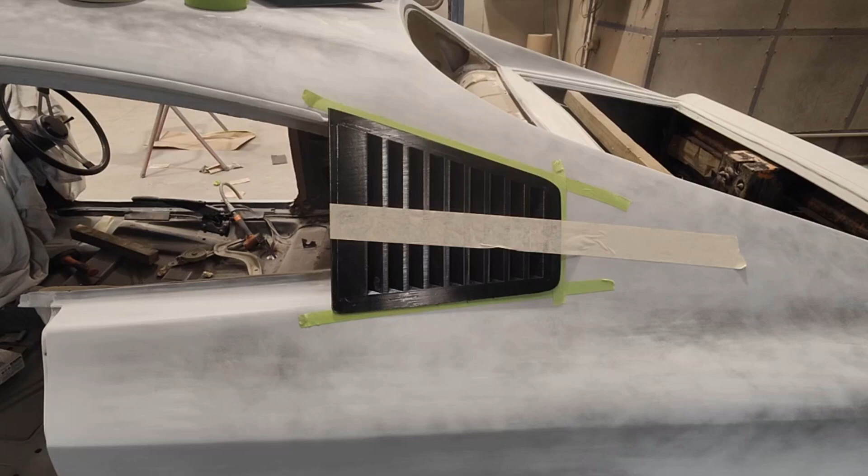Final piece to the puzzle. Make these things fit.

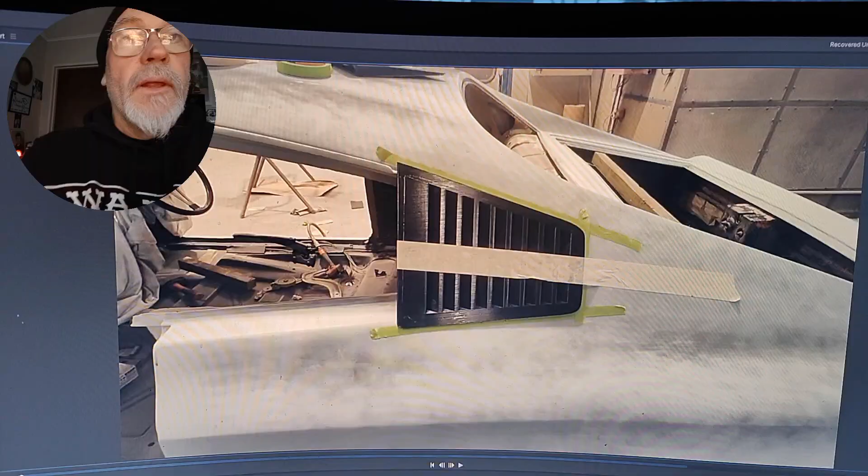Just to wrap a bit more context into this video, the body shop I work at in Invercargill here, we've had these 3D printed. I'd like to do a couple of little tweaks on them if anybody ever wants any.

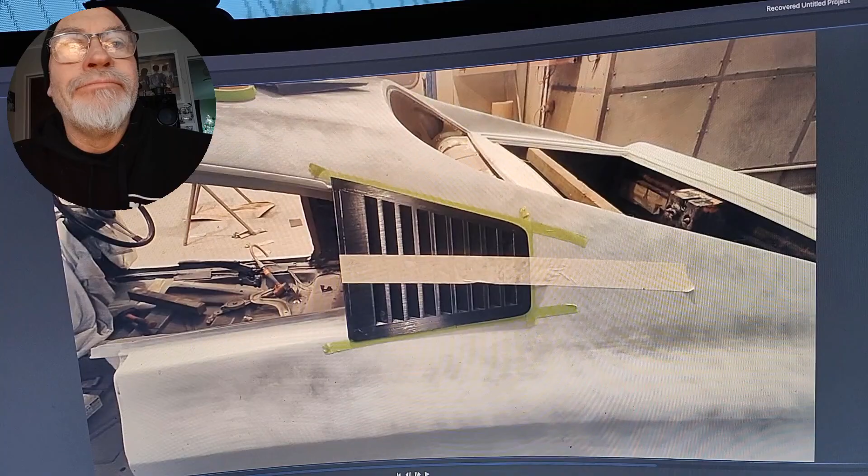I don't even know what these bloody things are called. They're like a louver side trim to the tail piece on a Valiant Charger. You can't even- we've hunted and hunted all over the internet to see if somebody makes them. We had the originals, but they'd been butchered and just filled, whereas they're meant to have a nice little body edge around them.

And I don't know if they were originally glued in or screwed in from the back or what originally. I'm not sure. I had a Charger. I think I explained that in the video a little bit.

I'm just going to add this piece in because I quickly took this video, or a couple of clips, when I was fitting one. But yeah, I had a Charger, but it had a steel piece in here, and then it had a vinyl trim that goes around there.

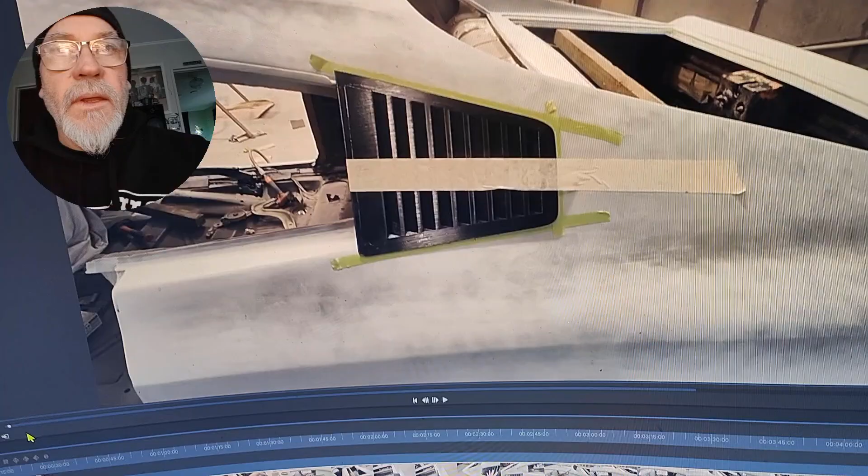So I never knew - it screwed in with 4 screws, 2 here and 2 here, that screwed into the bodywork, I think, from memory. I can probably find a picture on the internet if I really had to. But yeah, nobody seems to remake these. For what reason, I don't know.

Unfortunately this particular pair were still reasonably complete, but all the edges had been ground off, and there was no front edge on them. I don't even know that there's meant to be a front edge, but from all the photos I could see, when the rubber sits in there, there was an edge.

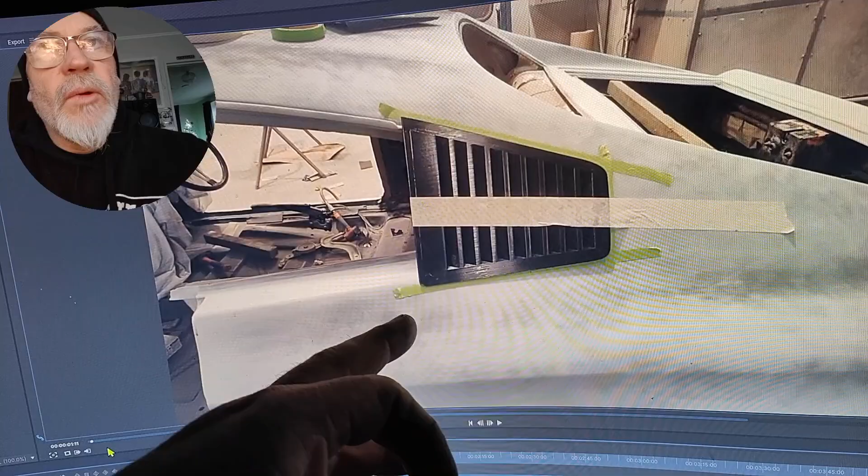So they 3D printed a rough one, and I fiberglass filled in what we needed to, and made it work. And then they made us a better print.

The only thing I would like to do is move this louvering forward a little bit on the print, and just make this edge piece, which we could trim a bit - what should I trim back on this - just a wee bit thicker. It's just a little light.

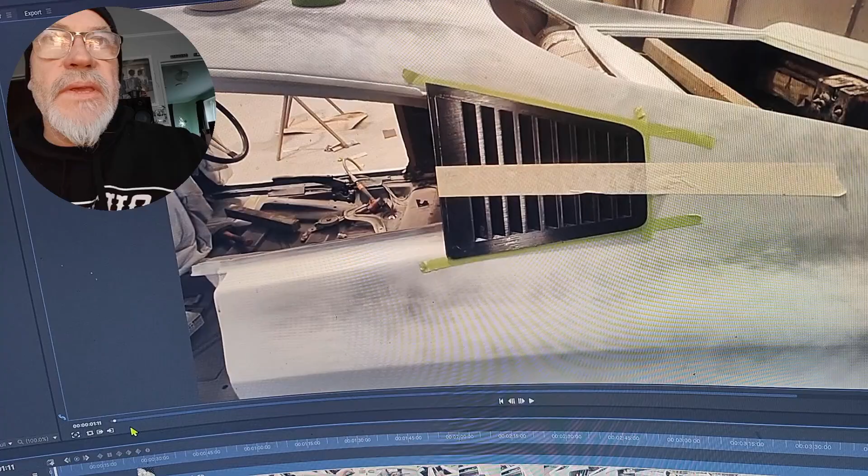I actually put some new tech type filler in around behind it with my finger, and just reinforced it a bit, and it made it quite strong. But if the print was just made a little bit thicker - it's a bit thin, I think - it would make all the difference.

But yeah, I don't know, I'm not sure exactly how the originals were, but it looks like they were just glued in - that's how they were on this car. But I didn't pull them off either.

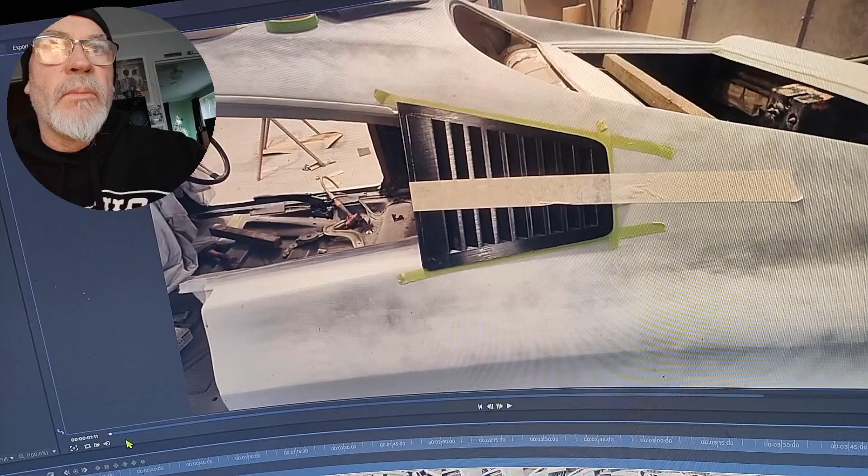I came into this car late in the stage and got all the front end fitting and done some repairs to the floor, and just went back over the bodywork that had already been done on the main part of the body, and just fixed and tuned in some things. It looks pretty good now.

This is about to go to paint next week, basically. So I spent the last part of yesterday - we got these about lunchtime - just making these fit, and doing a little bit of trimming, and then whatever, you know what I mean.

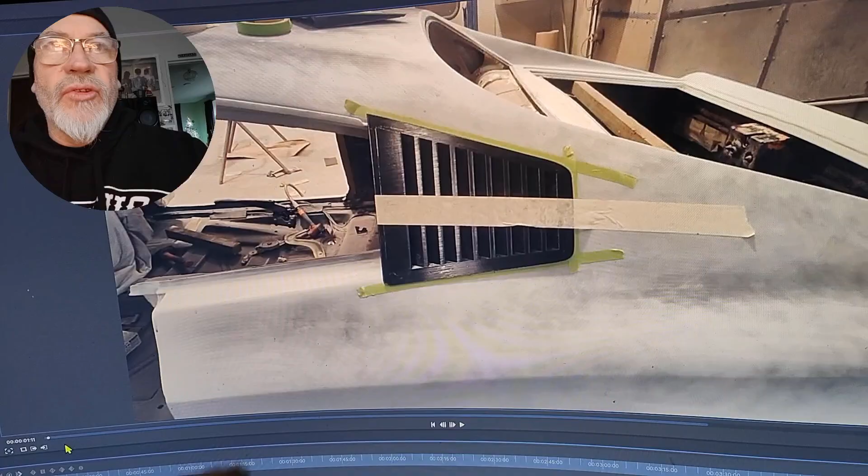Just spend a bit of time fine tuning them to get them to fit nice, and then hopefully blow a bit of paint in behind, and then these will be primed and sanded and made to look good. Once a bit of paint's in behind, they can be glued in. At least the panel behind will be sealed, just to help stop water, because water will run in behind it - it's kind of inevitable. And then it'll be panel painted on.

But at least if the water can get in and out, and it's painted in there, it's at least sealed. I don't know how else you'd do it, because you can't really seal around it otherwise you just end up with the look that it was - it's meant to have a body line, just a very fine line around it.

I'll pull up some photos of all the ones I've seen restored or in good nick, all the ones I've seen in person over the years that have had that panel on in good nick. They were all like that, but there's a few floating around that were fudged in, where the person didn't know what they were doing and made a mess of the bodywork in this car previously, a long time ago.

I don't know, probably back in the early 2000s or maybe the late 90s or something like that. I know who the person is, and they did it quite a long time ago, but it wasn't very well done. Anyway, I'll carry on with the rest of this clip.

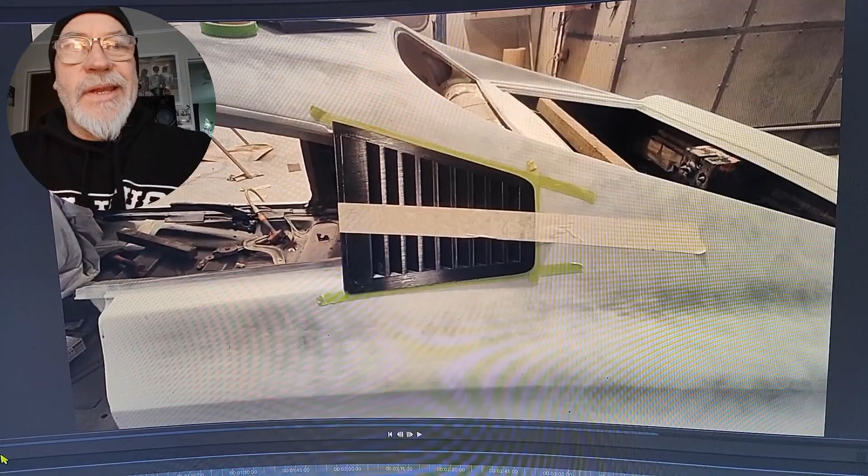It's just mainly how to turn this down, a quick idea of how to trim this down. If you ever wanted some, we could get them printed and send them to you, whether it's here in New Zealand, Australia, or whatever - it wouldn't be too difficult. We can get heaps more printed now that we've got the model.

I would just do a couple of little subtle changes to get this louver in a slightly better position. It needs to come in here probably only a quarter of an inch or so, about 5mm. It would just look a little better. But anyway, we'll carry on.

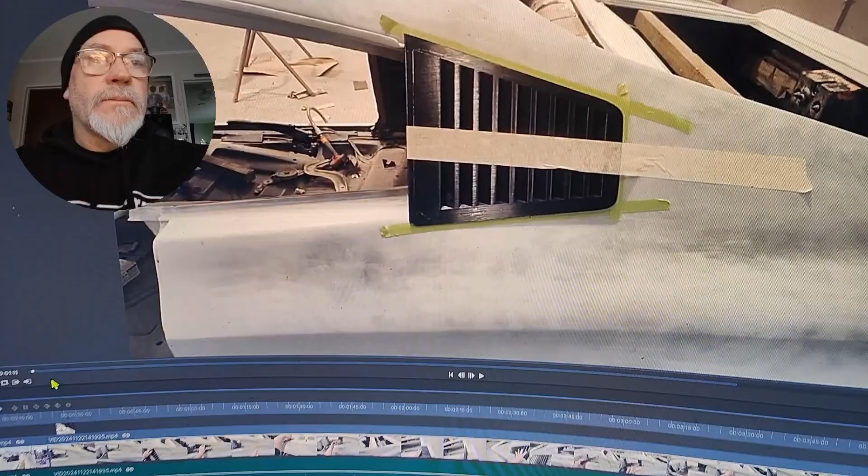Here's some 3D vent, they're like a fake vent that these Valiant Chargers come with - not all of them, but most of them, or a lot of them come with these vents. But these are some 3D printed ones, and we got these made bigger. They had quite a bit of excess out the sides. I've got a couple of pictures.

So what I did, so you can get this shape, is lay some tape on here, then put these in here, held them down with masking tape to where they fit in, and then laid tape against here so I could cut that excess off.

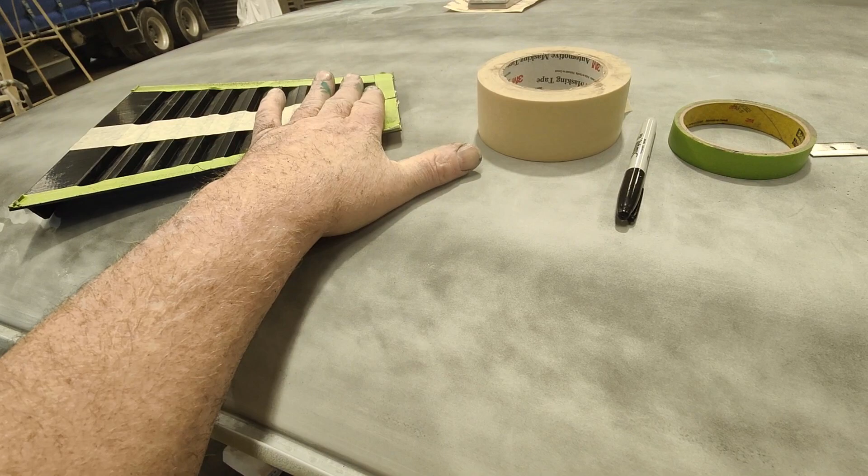What I'm going to do now is lay another piece of that wide masking tape down here, follow this line around here, draw a reference point on there which I've still got, lay that over the top against that edge where it would lay here, trace it around, and then do the final bit of sanding and shaping.

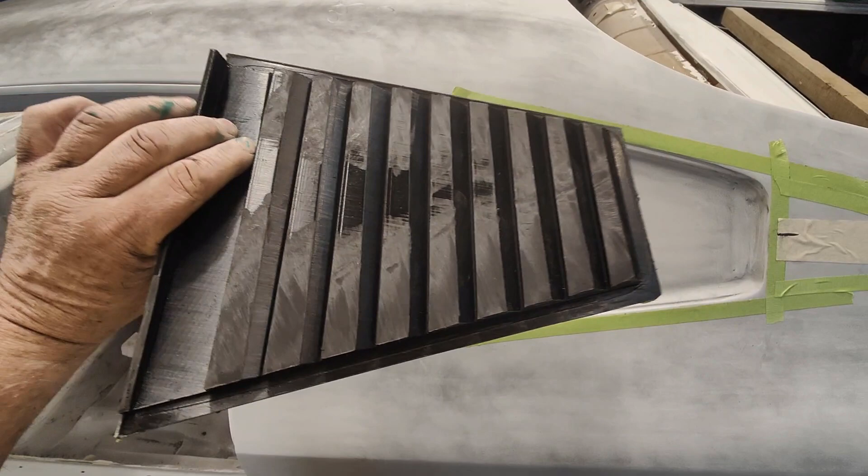They've printed these a little thin. If we get them to print some more, we'll get that edge a little thicker, just so it's a little stronger. What I've done is put a bit of that New-Tech type glass filler around the edge, just to beef it up.

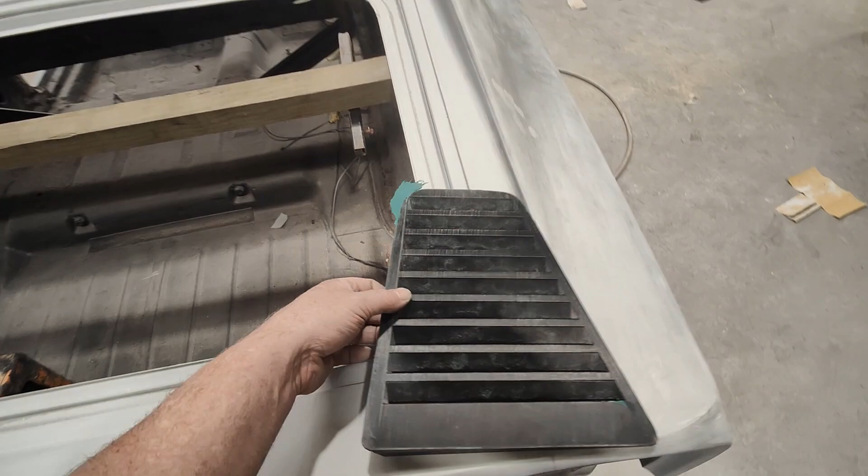The other one, I'll show you what I mean, because I split one when I was trying to sand it up. I did that to make them a bit stronger, give them a bit of extra guts, pushed it into the edge with my finger, laid some masking tape around it, then mixed up some filler and laid it around there. Because I split this one, I reinforced the rest of it as well and put a little more in here.

This one fits in here. I've just got to trim this back again.

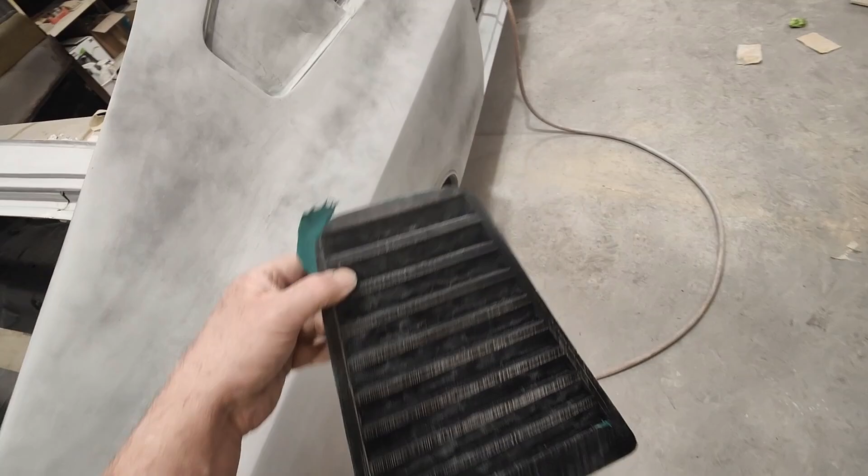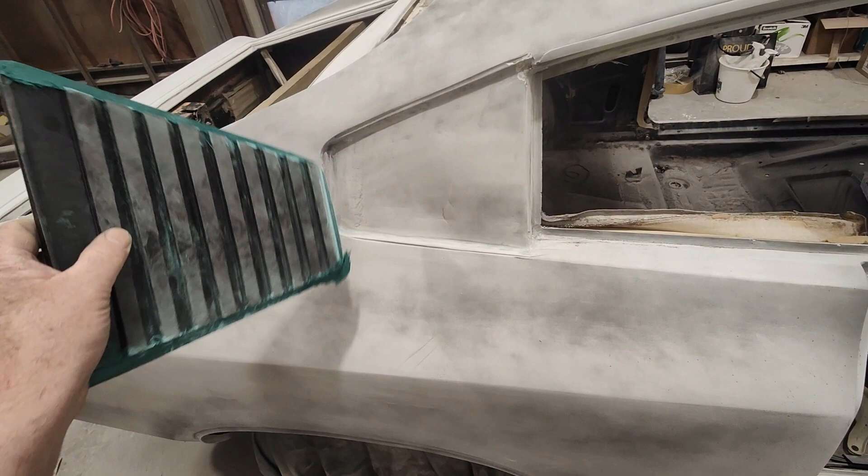So they fit in there, and then the window rubber fits up against this. Yeah, we had to get these made. Unfortunately, we had the originals, but they had been bogged into the car and there's no edging.

So we got some made and tried to make them look correct, I guess you'd call it. We know that, so we can get more of these printed off if anybody wants them here in New Zealand and Australia, and wherever else, because we couldn't buy them.

Unfortunately we had the originals, and we got them to make a test print, and then I made it fit and did the extra stuff where it comes around the edge, because all the other ones have been cut off and just filled with body filler. This had quite a lot of work done to it.

This car, I didn't do a lot of it, but I've finished it. They'd just been all bogged in, and they were flat. There was no seams - it just had the thing where it's meant to be like a little edge around there, like a body panel gap, a fine panel gap.

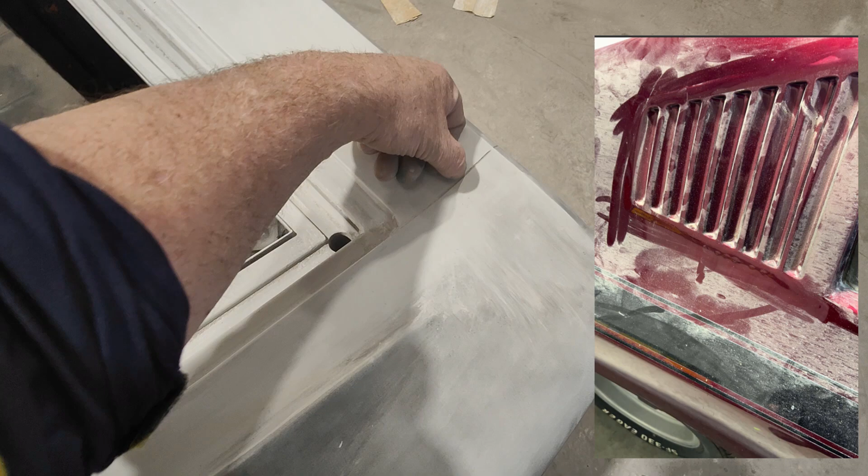No, but like this sort of thing - just meant to be like a little fine panel gap around there, from what I can tell on other photos.

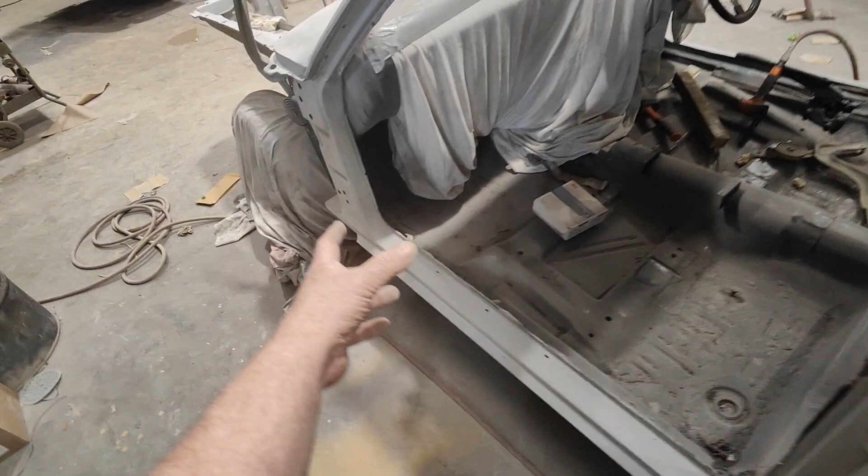I had one of these years ago, but it just actually had the flat piece in here and had a vinyl trim thing that came down here, and then onto the front doors that stopped here, had like a little vinyl trim, and it just came up and covered this, and it had a metal piece in here that was screwed in from the back, or from the front.

So yeah, we had to recreate these from a set of originals that had been butchered. That's how I've made them fit. So I'll do my final little piece now.

So this is what I'm doing with this back edge piece. Just laid a piece of tape up against the green line, which is where this one laid over. So when I covered that, I could see where it went out. I laid a piece of tape down there, and then we trimmed it off up to here.

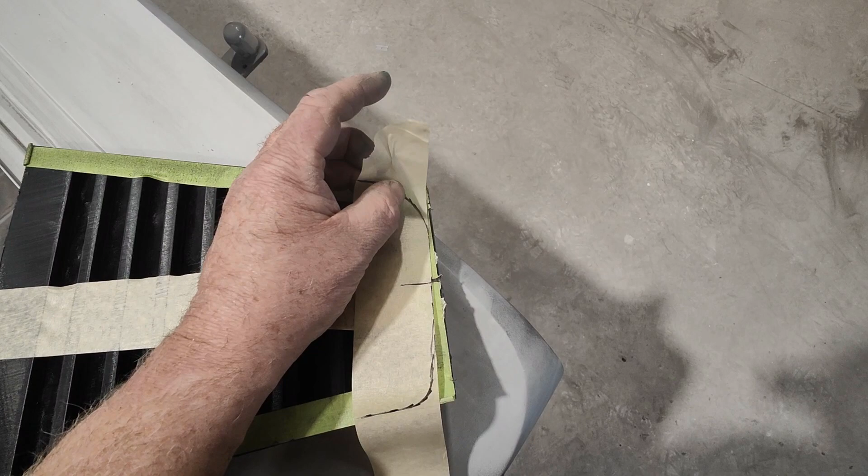Now I can pull this off here. Try and show you one-handed if I can. Now I can pull this off here and lay this on here with my reference mark, but I had to do it one-handed.

I'll do this with one hand or two hands in a minute, but you kind of get the idea. I can lay it over the top and get my line lined up better, and I can trim this off, and then we can really final sand these and trim them back until they fit in.

So they just fit in this edge, and then they'll be ready to be primed and bodyworked. This will be sprayed colour in here, and then it'll be glued on. I don't know how they originally attached, but we're just going to panel bond them in or something like that, and then the whole car will be painted.

We'll blow a bit of colour in here when they do the door shuts and stuff. I think a lot of our panels have been coloured up on the inside. So we'll blow a bit of paint in here, around the door jambs and whatever, probably the engine bay, and then we can glue all these pieces in and put all the doors on and everything, and that'll be painted on the outside, and it'll have its final block ready to go.